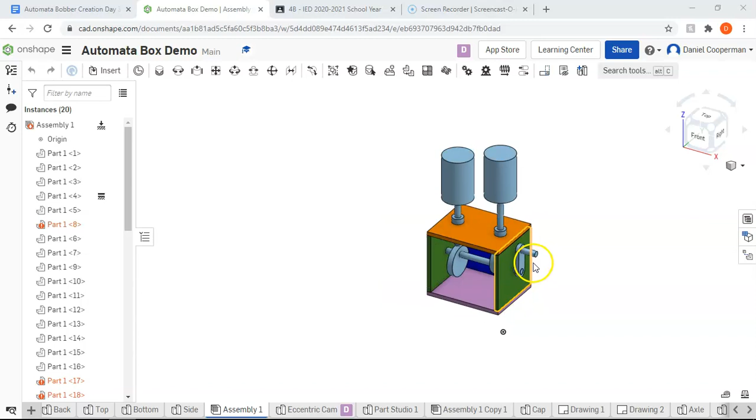And this is what the motion will look like when we are done. When you grab the handle and move it, it moves up and down like so. And that's what we're going to work on today.

So I made a copy just to show you what it looks like before we do the cam and the follower and the washer and the bobber.

So the first thing I want to mention is you are most likely going to have to make some edits to your top and possibly even your sides. Maybe you need more holes, maybe you have to move your holes, etc.

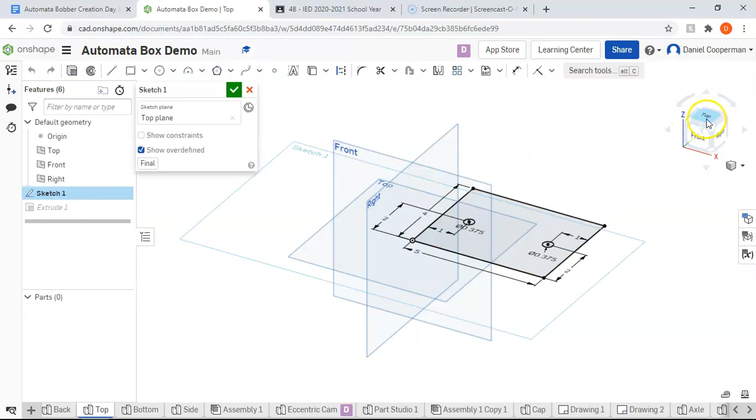If you have to make some edits, you can go to your top right here, right click, edit your sketch, and then it's real simple. Just change this dimension right here, and you can get your dimension right, get your holes to change. Fortunately, when you go over to your assembly, it does a pretty good job of updating automatically.

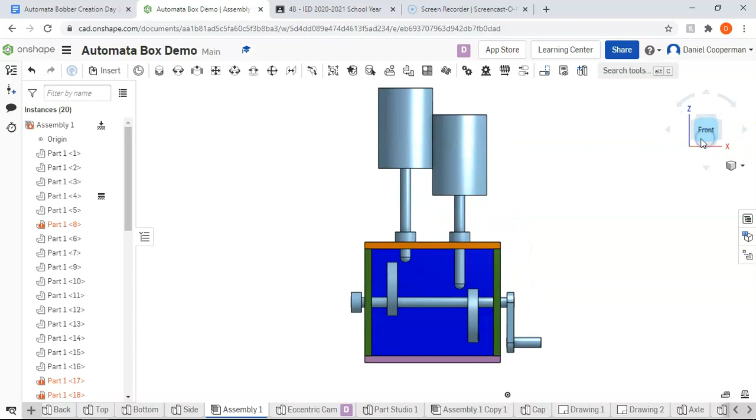So that's not okay the way I have it intersecting right now. You definitely want to make sure that your bobbers are not touching each other. So maybe we would want that to be a little bit different, but you get the idea.

With the sides, I changed it up from when it was originally. I think this was like 1.5 or something. I changed that to be 2, so it's right in the middle, and that'll maximize the size of the cam that you can have. So I would make my side 2. I think it was 1.5, 1.25.

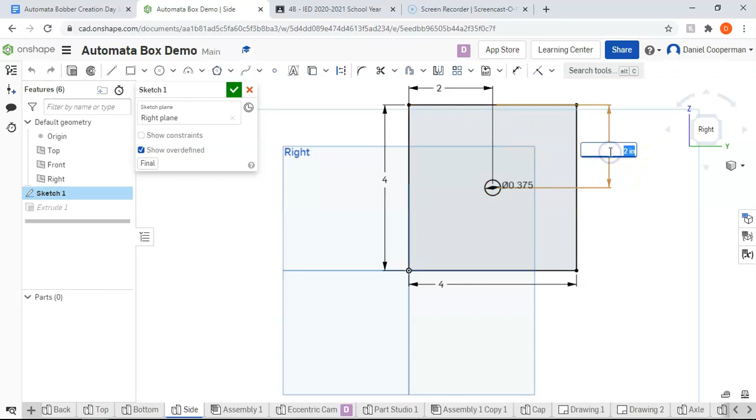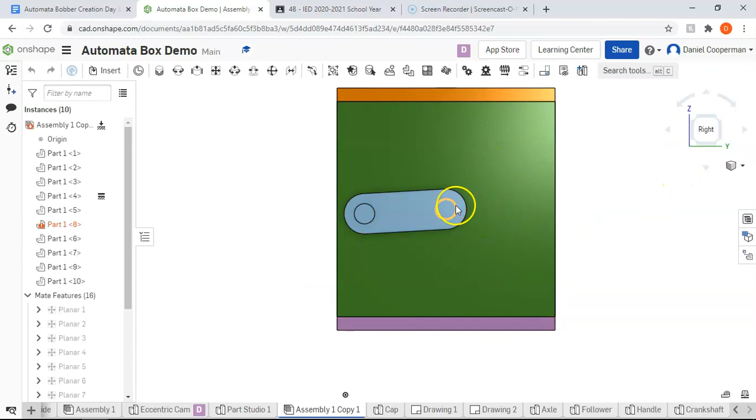Another thing that I changed was I changed the handle. I think that the crankshaft's was, I believe, 2, and I made it 1.5, because the way I had it currently, after I moved this hole right here, it was going past the bottom, which I wouldn't want.

Okay, so that's how you make changes. You might have to make changes. You might have to add more holes.

Real simple. Okay, the next thing I'm going to do is I am going to begin importing my cams. You have a few different cams. I think I only have one here, and that's the eccentric cam. So I'm going to import my eccentric cams.

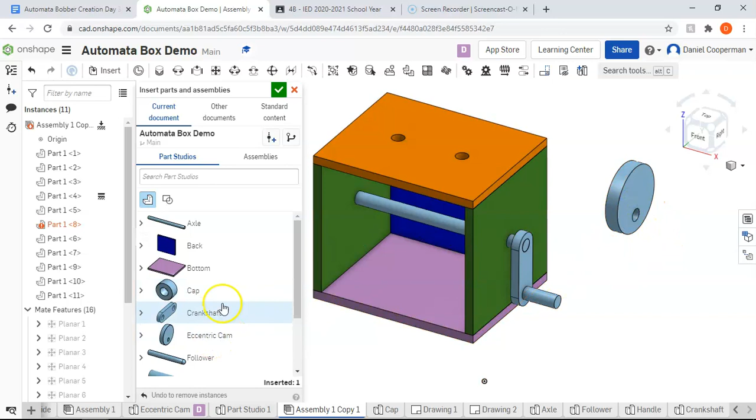I'm also going to insert 2 more of those caps that I put right there, and that's going to be going on the top. And I'm going to insert my 2 followers, and I'm going to also insert my bobber, which I haven't really renamed it yet.

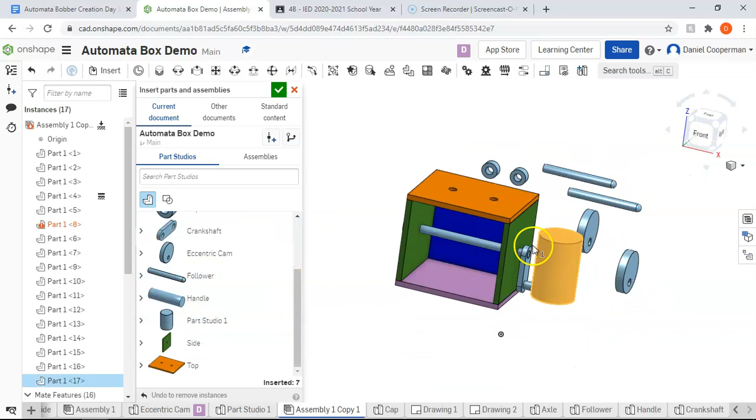I should. And of course, my bobbers are overly simplified. I expect more from yours.

Okay, so let's put these washers on top. Fasten, and then get the top of here, the top of right there. Wrong direction. Good, that's one.

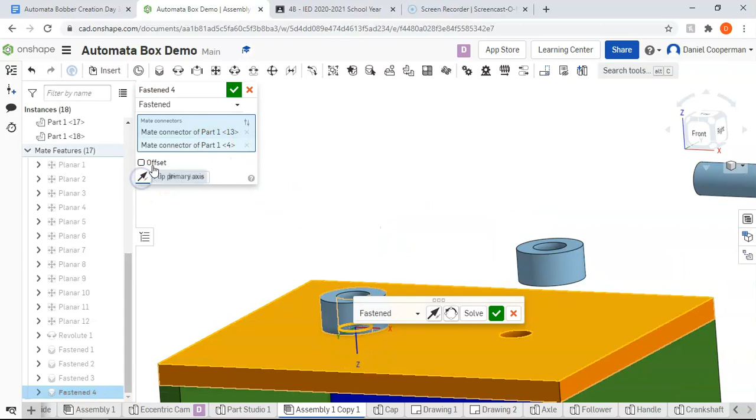And now we'll do the second one. Good. Good. Wrong direction. Good.

Okay, now we are going to begin putting the cams on. Now I just did the eccentric cams. You might do different cams. It's all going to be the same process as long as you have your proper hole right there.

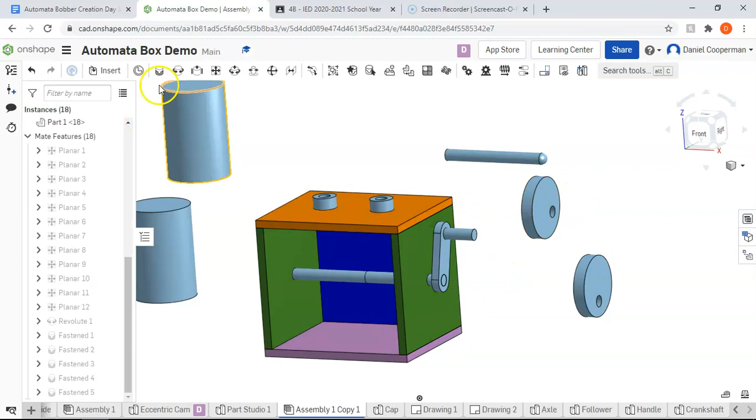And we're going to do the fasten for this. I'm going to say I want to fasten this hole right here with this hole right here. Okay? And that looks good.

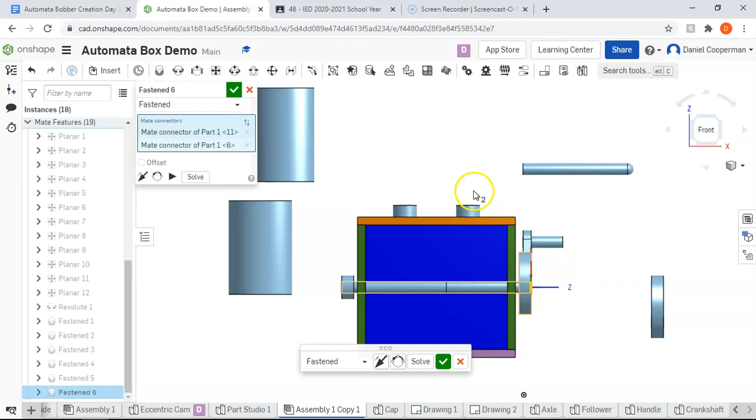But we are going to have to do some offset, because we want this to be located directly underneath that hole right there. So we're going to turn on offset, and you're able to offset this in any of the 3 directions, X, Y, or Z. For me, and probably yours, it's going to be in the Z direction.

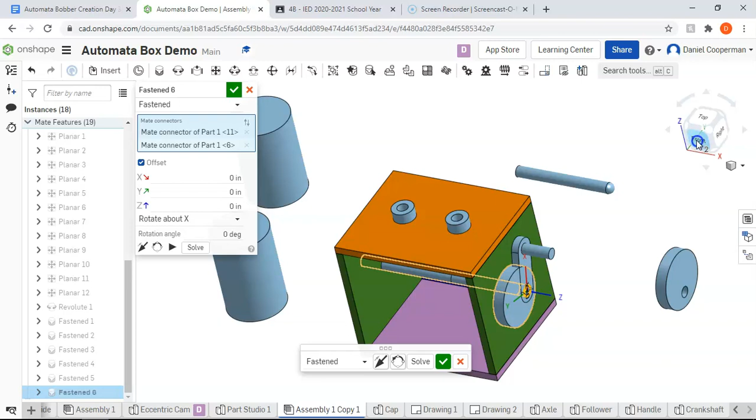So you have to figure out what that offset distance is. It's not bad to figure that out if you know what the distance from the center of this hole to the edge is, and then where your overhang is. But if you're not sure, you can kind of just start playing with the numbers until it works.

So let's just try 6 inches. Okay, it's going in the other direction, so we're going to have to make that be -6. Way too much, right? So I'm going to go back, right-click, edit, and then you can just try different configurations.

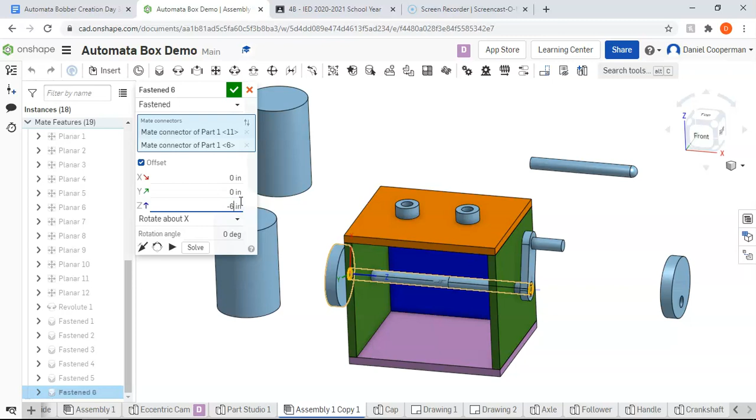4.5. Okay, getting a little closer. Let's try -4. A little bit too much, so we'll do 3.75. And that looks about good.

It's actually probably a little bit more. Okay, that looks good to me. And I'm going to hit OK. So now, when you move this, it should be rotating with it.

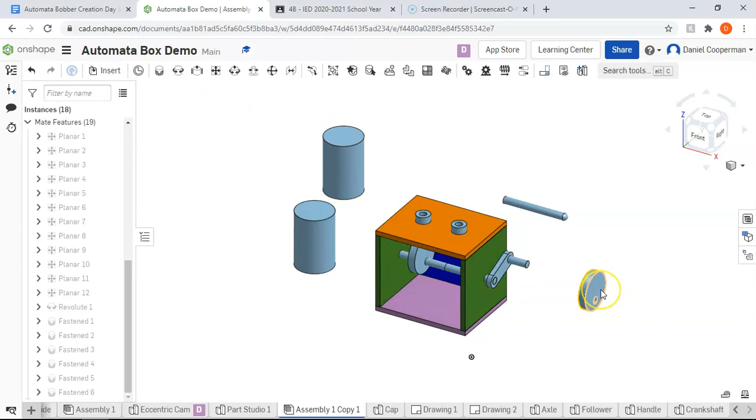All right, awesome. Now we're going to insert this cam right here. So I'm going to do the same thing, fasten, and I'm going to get that hole through right here.

Did that not work? All right, I'm just going to try it again. I think I missed something. Fasten from here and right here. Okay.

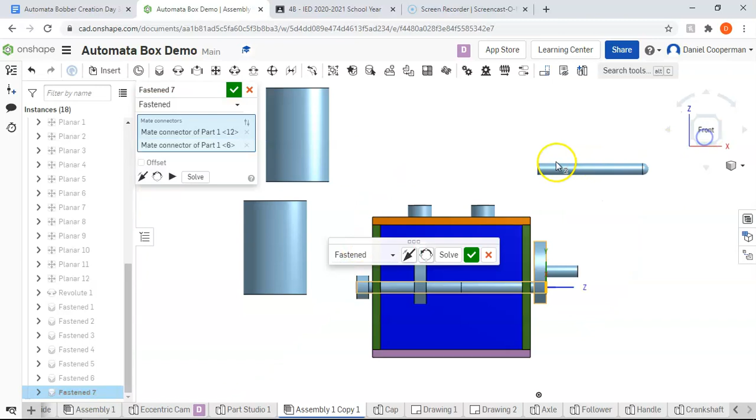And offset. And let's start with -2 and see what that does for me.

Okay, a little bit too much, so let's try 1.75. That looks good. Maybe make it a hair more. Yeah, I like that. Okay, I'm going to hit the green check for now, and you can see if that worked.

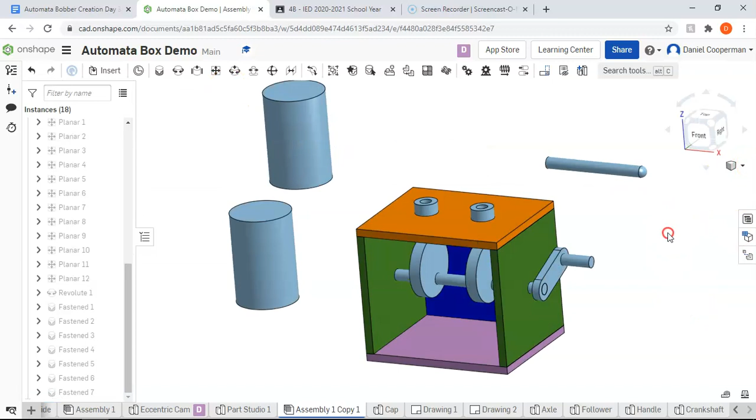That worked, although this is going to make my bobbers constantly be with the same displacement. These two bobbers would be moving up and down at the same location at all times. You can see that over here. Or where's my assembly? Right over here.

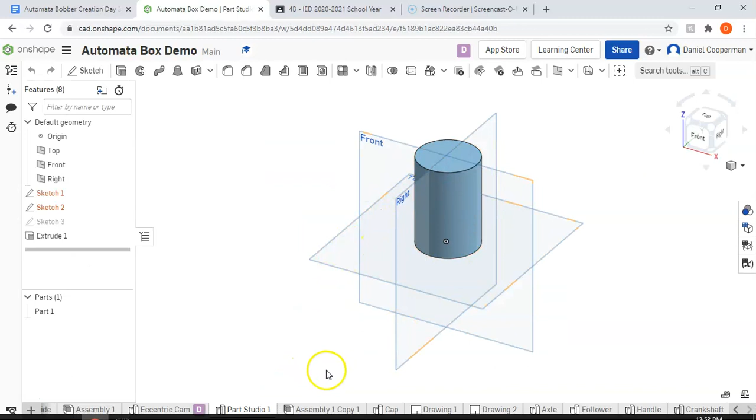The way I have it over here, they're alternating. I kind of want to show you how to do the alternating, because I think a lot of you are going to want to do something like that. So here's how you have them be alternating or staggered.

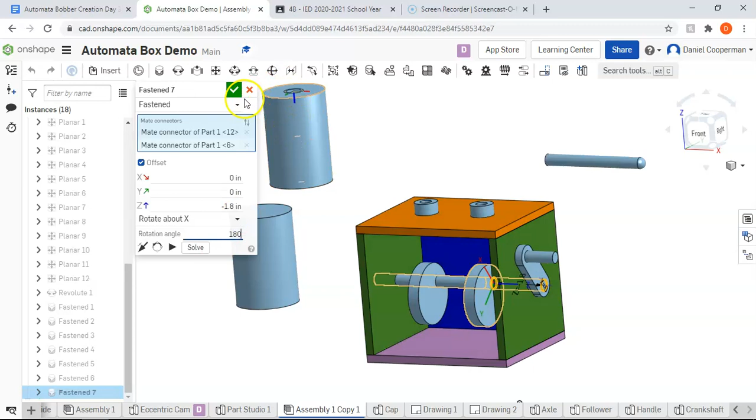Okay, so we're going to go ahead and edit the one we just did. I'm going to right click and then edit. So rotation angle, you're just going to have to change that to be maybe 180. Maybe you want to do it to be 90.

And that just flips it. And now, when you move it, it's going to be at a nice spot. How did it get moved? It looks a little bit off now.

Let's go ahead and edit that distance. So I want that to be maybe -2. A hair over 2. Okay, that's probably good for now.

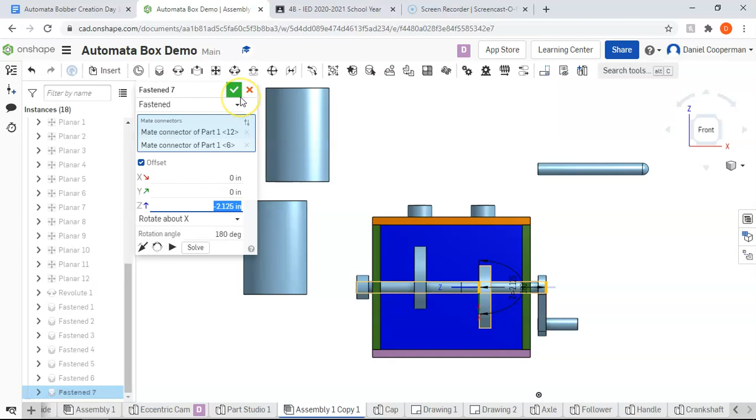You can always adjust it slightly later, because once you have the follower here, you can see where it's resting. But as long as it's touching a little bit, it'll actually be okay.

Okay, and let's make sure that we're still good. Alright, and we're good. Okay, now let's put these followers in. Where'd my other follower go? Maybe you only put in one before.

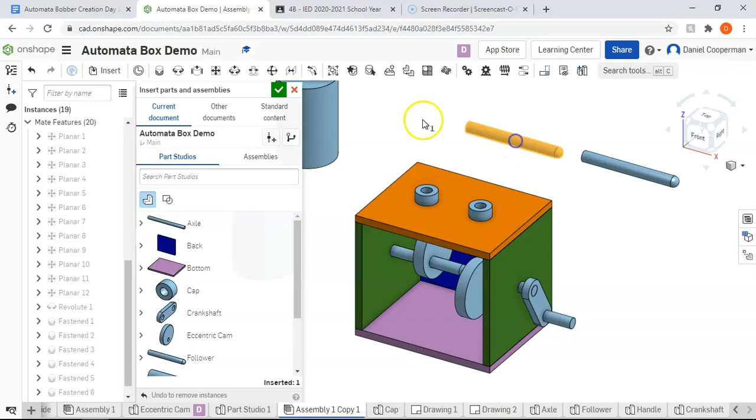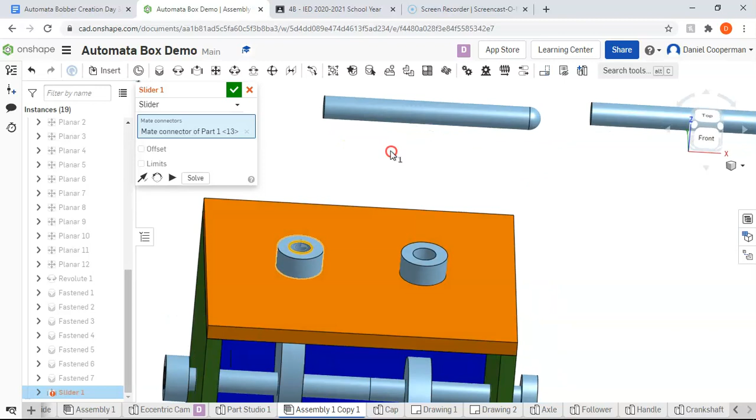We're going to have to do 2 constraints to get this follower in. The first one is going to be the slider, and the slider is going to let it slide up and down. So let's go ahead for the slider mate, and we're going to have to say that we want that to be matched with this right here, and that direction looks good, so I'm going to say okay.

And then we're going to do it again. I want this right here to slide through with this right here. And is that direction good? I think so. Okay. So let's pull it out a little bit.

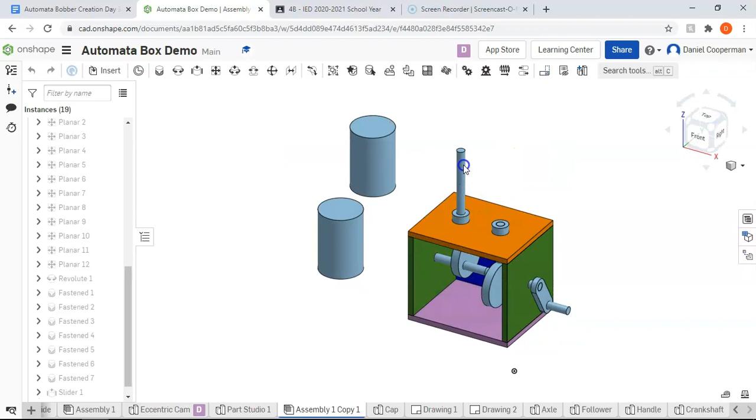And now what we want is almost like a gravity effect. We want this to be going down on gravity, and then it'll stop moving once it makes contact with the cam. So to do that, we are going to do another constraint called tangent.

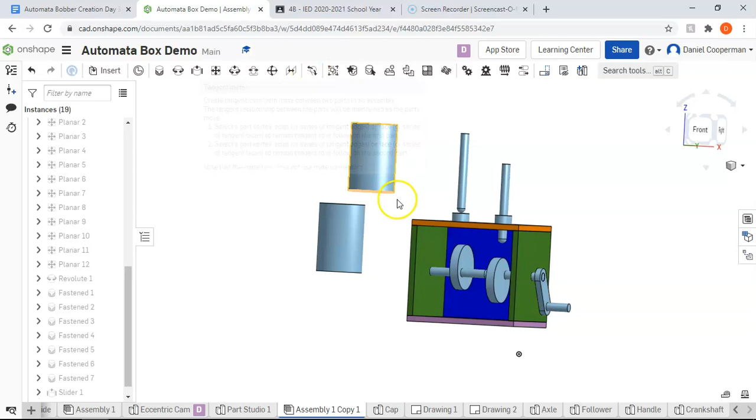What the tangent mate does is you choose 2 surfaces that you constantly want to be kissing. It's kind of like the planar mate, only this is going to be with movement. So we're going to do tangent mate, and I want this surface right here to be always tangent to this surface right here, the edge of this side.

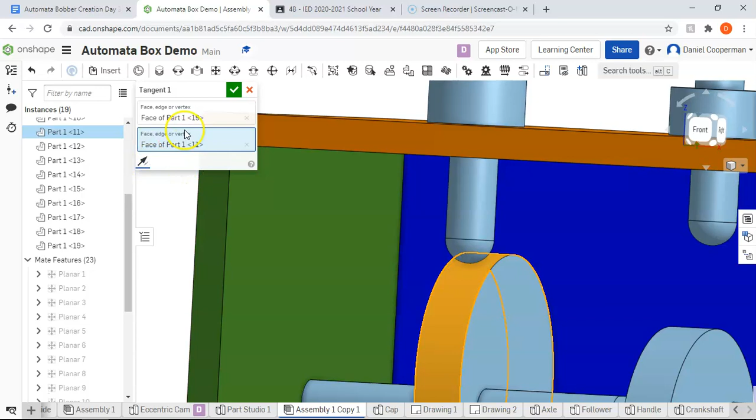That doesn't look very good to me, but if you change the direction, it is going to be touching it properly. Tangent this surface right here with this surface right here. Change up the direction, and then okay.

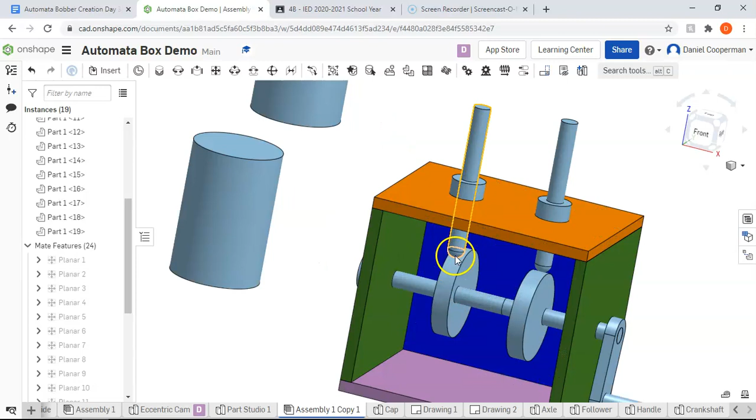And now, if we did it right, when we move this, let's do something like that. It's moving up and down. And see, as this is rotating and changing, it's still just making contact with the surface as if gravity was pulling down on it.

Ooh. And then the last step is just to attach your bobber. So you needed to do your bobber in a way that you're able to connect it to the follower. So any kind of connection will work. It doesn't matter if real world physics is applied or not. Just make it connect. So I'm going to do a fasten.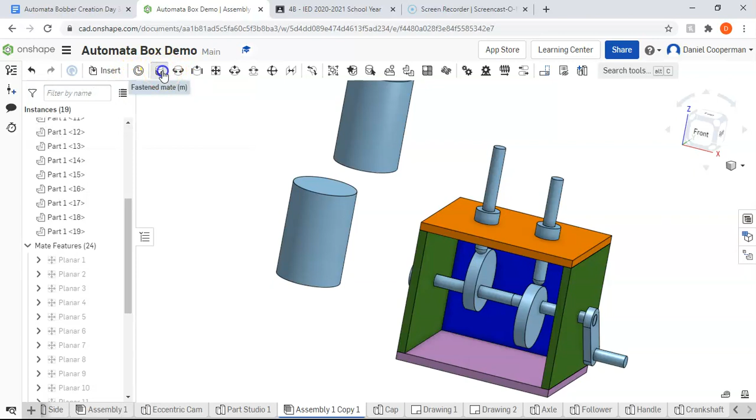I'm just going to do the fastened of 2 concentric circles. That's the right direction. Good. And then fasten this with this right here.

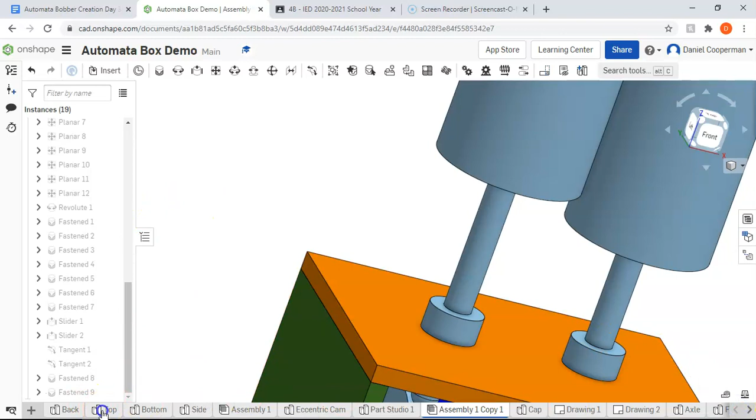And I never changed my top, did I? So we'll have to change my top just so I don't like the way those are touching each other. And that might happen to yours too. You'd be like, oh man, my bobber's too big or something. So you have to just make edits. You gotta figure out how to make it work.

So let's make this 1.25 each. And you might have to make edits to your top, your side, your bobber. You might have to do more holes. You're going to have to be creative with it. I didn't do this one as a one-size-fits-all type thing.

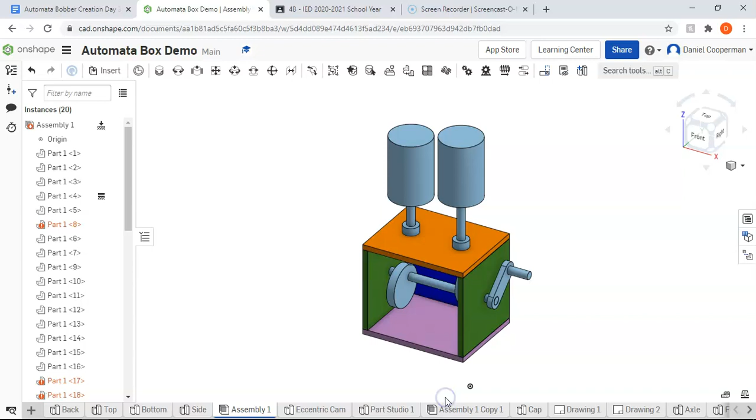Okay. And now let's see if we're good. And we are good now. So when you're finished, it should have a cool motion.

It should be sliding up and down. Your bobber should be properly attached. Your handle, we don't want it extending past the bottom, because if the handle extends past the bottom, then when you're on a table, it won't work.

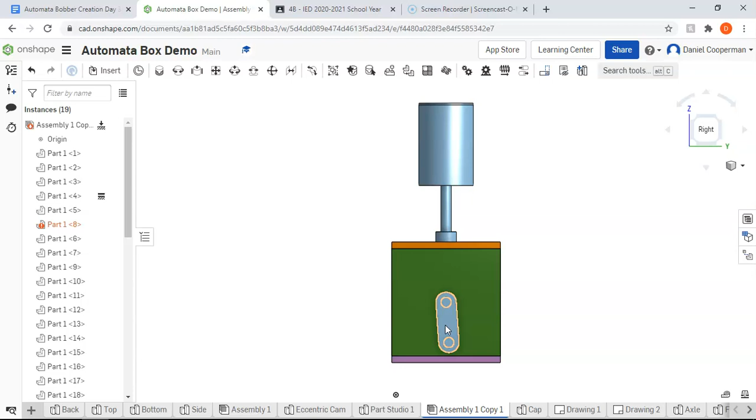And I think that's it. That concludes this video, and hopefully you are able to finish up your Automata this next class.